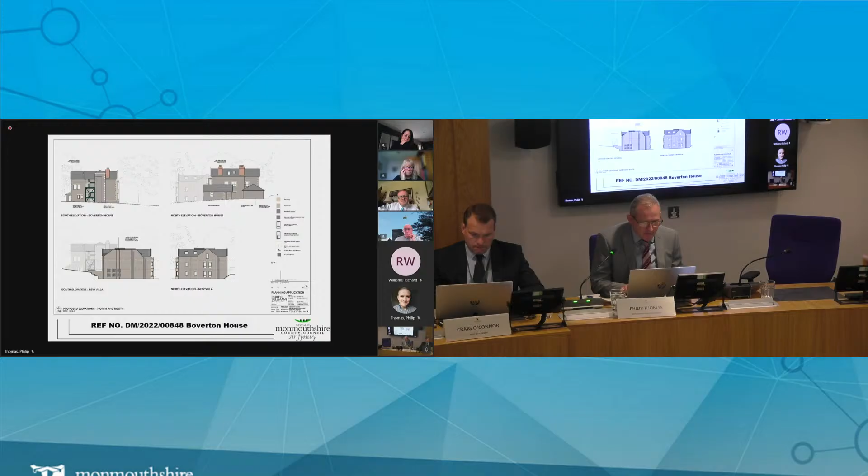And then that shows the layout. So you can see that the existing Boverton House is to the north and the new block to the south, and there will be parking in front of each of the two buildings there.

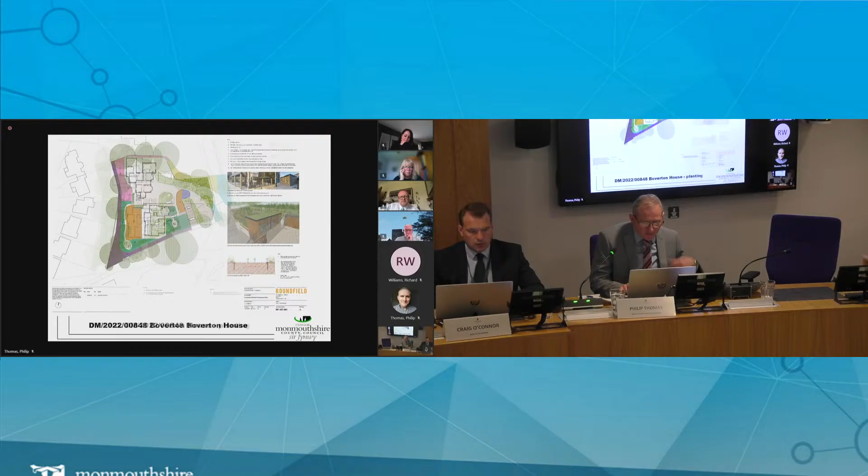And then that's the landscaping green infrastructure plan. There'll be extensive additional planting to green up the site and to reduce the impact of the additional parking spaces provided. The large mature trees around the periphery would be retained.

And then those are the floor plans of the apartment block: ground floor, first floor, second floor, and then some photos.

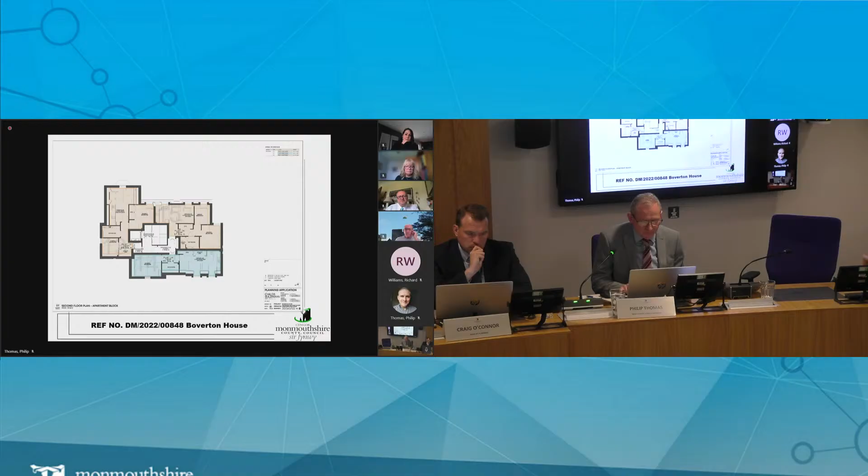So those are the issues. The existing boundary trees will be retained, and vehicle and pedestrian access to the site will be achieved through the existing access point at Bulwark Road, which will be widened by two metres to improve access for residents and emergency service vehicles.

The existing wall will be swept up the driveway to align with the altered road access. The existing access will be resurfaced, and the existing gate refurbished. In total, 21 car parking spaces will be provided within the site, and 20% of these will have electric vehicle charging points.

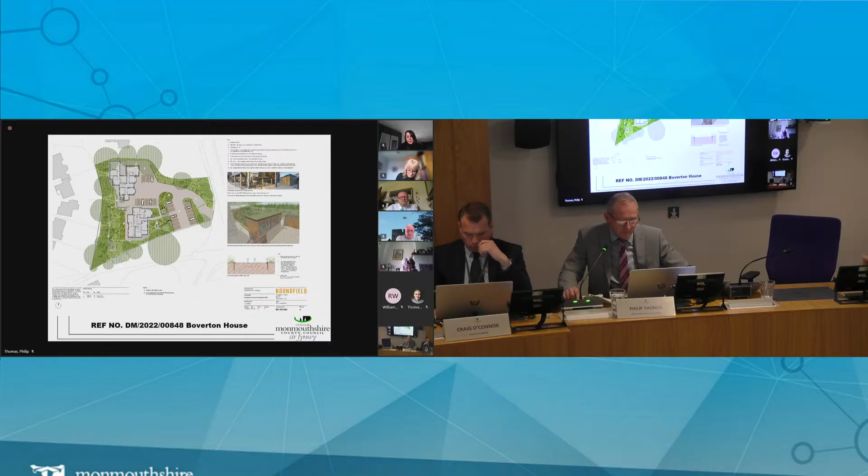In terms of e-bike charging, sorry, I haven't got that response—we can put that to the developer. I'm not certain it's something we can insist on at this stage, but we could encourage them to provide e-bike charging provision within their bike store there for up to 15 cycles.

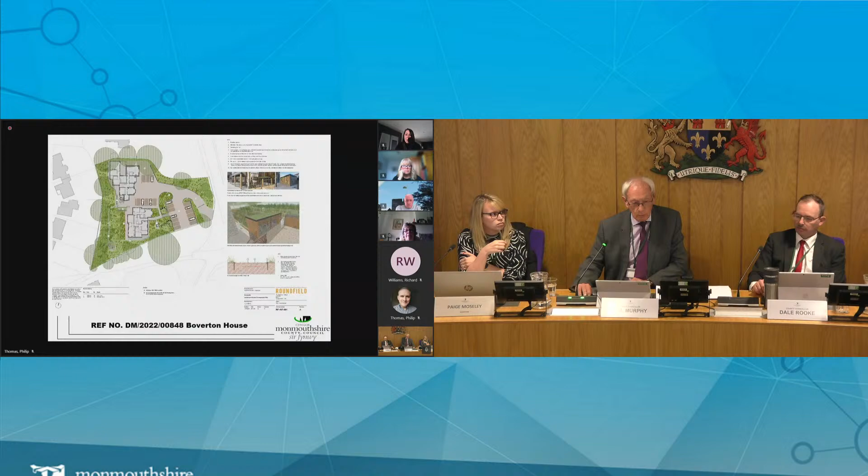Thanks for the presentation, Phil. I share your comments, Chair, about it being nice to bring an old dilapidated building back into use—I think it could be a big improvement on what's existing there at the moment. I had a question regarding the extension; it looks like an old lift shaft on the outside of the building, currently a tatty white. Looking at the diagrams, it looked like it was going to be refaced in stone with brick edging. Could you confirm that? I think that would be a big improvement if so.

Some of this involved negotiation with our heritage team, because whilst it's not listed, it's in the conservation area and makes a positive contribution to it. They're going to re-render it, keeping it simple, but it will be in better condition and aesthetically better from being re-rendered and repainted, so it will look a lot better than the rather tired appearance it has at the moment.

Okay, Councillor Bond. Thank you very much, Chair. Thank you very much for the presentation. Lovely old building, beautiful old building, lovely setting.

Really disappointed that there's no affordable housing, flats or whatever on the premises. I understand what you said about the independent advisor, and I think you mentioned when we were on site that if more profit was made out of the properties than anticipated, they'd be paying more back into MCC. I'm also disappointed this was an MCC building sold to a private developer back in 2020, and I wonder if we've got anything else we ought to hold on to before we sell any more off.

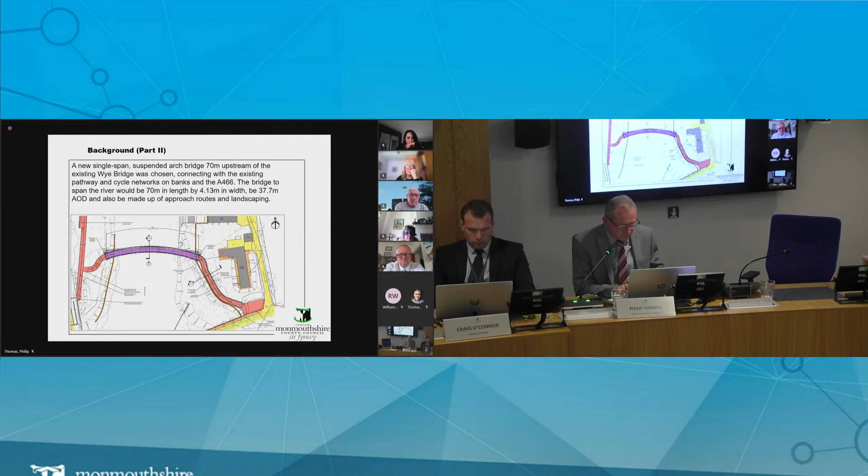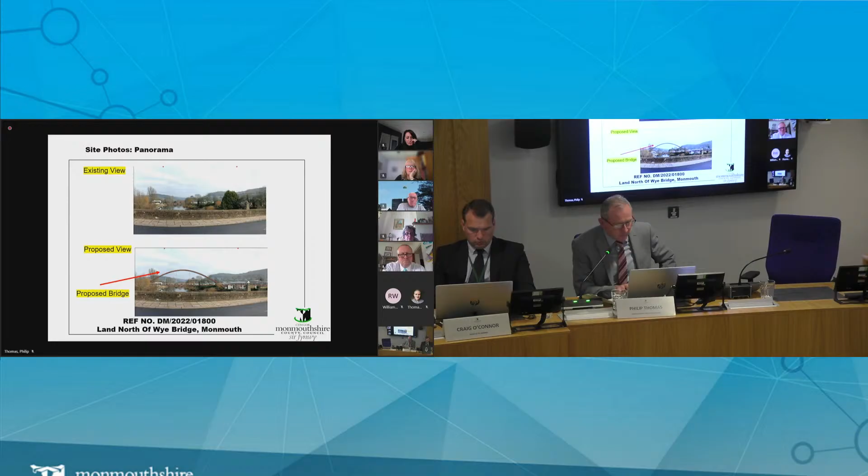That's a montage showing the before and after of how the span bridge would look, and that's probably an even better image there - clearer. That's from the middle of the existing road bridge, and that's from the other side, near the rowing club steps, where they launch their boats.

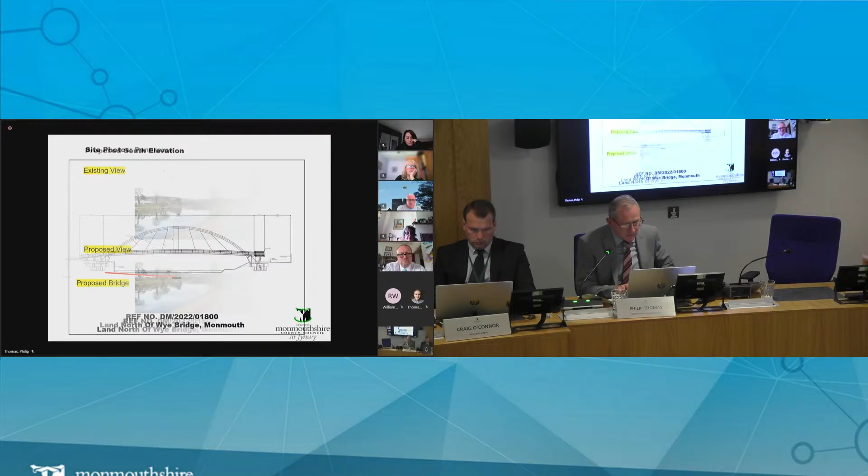And then that's an elevation of the bridge. There are no works within the river itself; it's all within the banked areas.

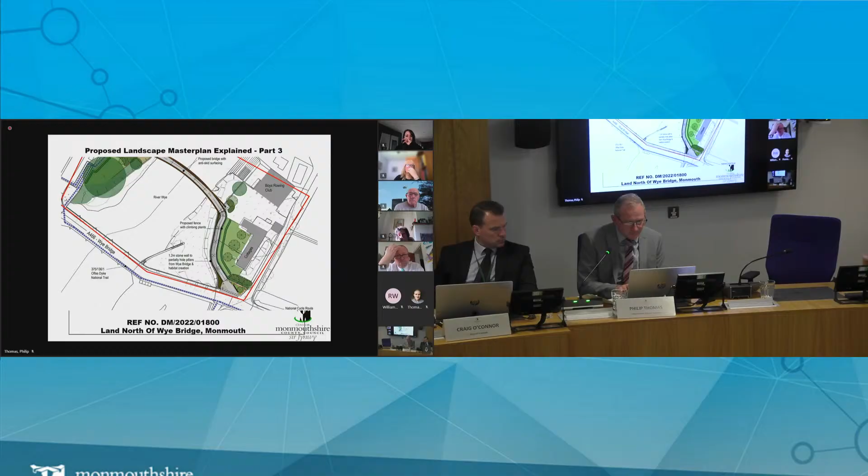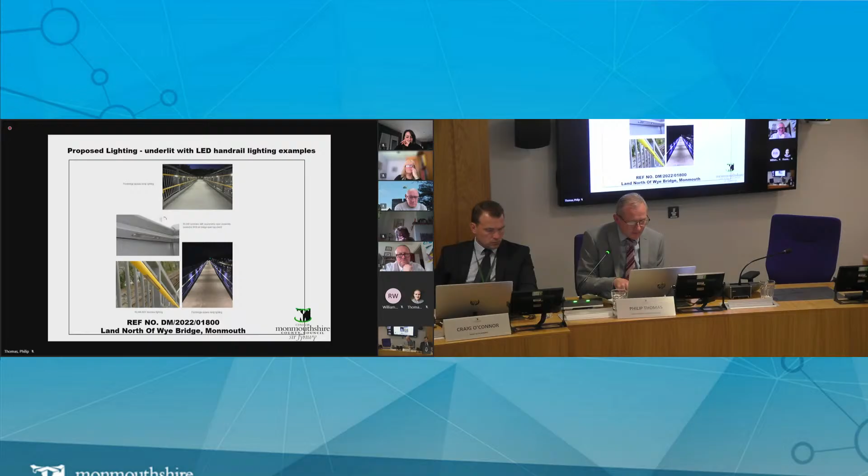And that's the sort of thing that there'll be subtle lighting to light the actual bridge for users, but not to let light spill out. And those are the main material issues.

As said, the main bridge is to be a steel cable-stayed arch structure comprising a curved deck suspended from a single arch via 7 pairs of cables, with a single span length of 70 metres, and the actual width of the active travel route within the bridge will be 3.5 metres wide.

It'll be modern in appearance, and the proposed materials have been carefully selected to respect the setting of the surroundings and the existing Wye Bridge.

As part of the development phase, an environmental colour assessment was carried out to inform colour selections, and weathering steel was selected for the main structural parts of the bridge, because once the material is weathered, the rust tones will complement the existing brown hues of the surrounding environment.

The use of brushed stainless steel for the hanger cables and guardrails would then complement the brown hue of the weathering steel. The lighter colour of the steel will blend into the skyline, particularly on overcast days, and there is a condition to ensure the details of the colours are agreed by the planning authority.

The proposed bridge is set 70 metres away from the listed road bridge, and there is a sufficient separating distance for it not to have any harmful impact on the bridge or its immediate setting.

The elegant span and arch of the proposed bridge sets it as markedly different to the listed structure, and this works in placemaking heritage terms, although details such as the balustrading and the stone wall for the eastern ramp have been requested to be conditioned.

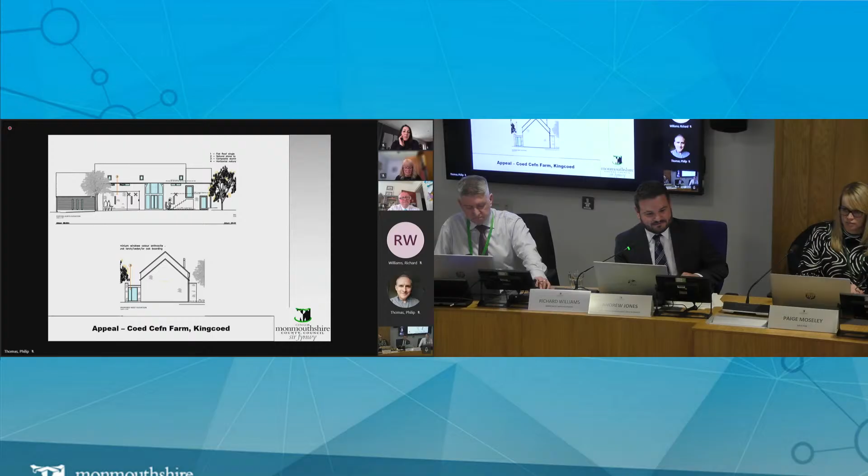Officers refused the planning application for two reasons. The first, on the basis that the existing access into the site would not be suitable as a private drive, given its restricted width. Officers felt that the use of this access by an additional dwelling would be detrimental to the safe passage of vehicles using the private drive, and therefore contrary to our adopted highway design guide.

And the second reason for refusal by officers was that the applicant had failed to enter an appropriate legal agreement to secure the necessary financial contributions towards affordable housing.

However, the appointed inspector found that having regard to the low traffic volume, domestic use of the driveway, and the driveway width and alignment, there was little evidence to suggest that an additional dwelling would give rise to significant highway safety risks. As such, the inspector concluded that the proposal was compliant with our relevant policy MV1.

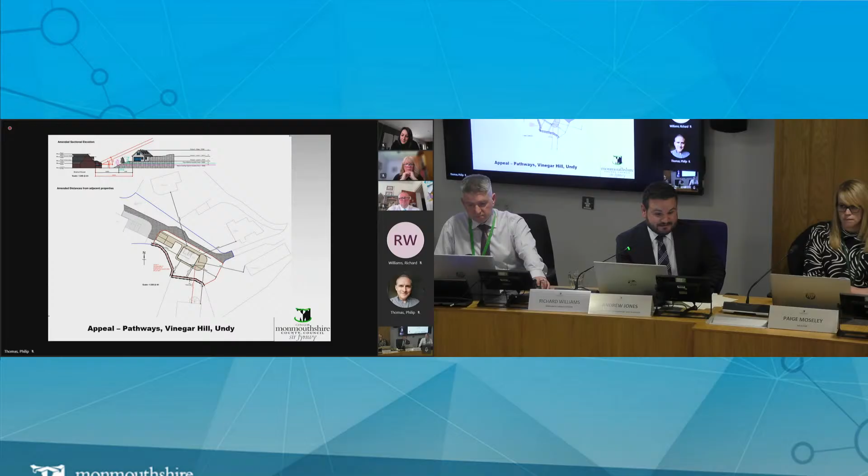However, there was an absence of a completed legal agreement to secure the affordable housing provision, and it's on this basis that the appeal was dismissed. So on the point and reason for refusal regarding highway safety, the inspector was not in agreement with us, but ultimately the lack of a Section 106 agreement was the reason it was dismissed.

Chair, can I have a say on that please? I'm so disappointed that this appeal has not been granted to us. It was clear that this application did not conform to the 4.1 metres that you agreed as officers. I just wondered whether we have any redress on this, because this road...

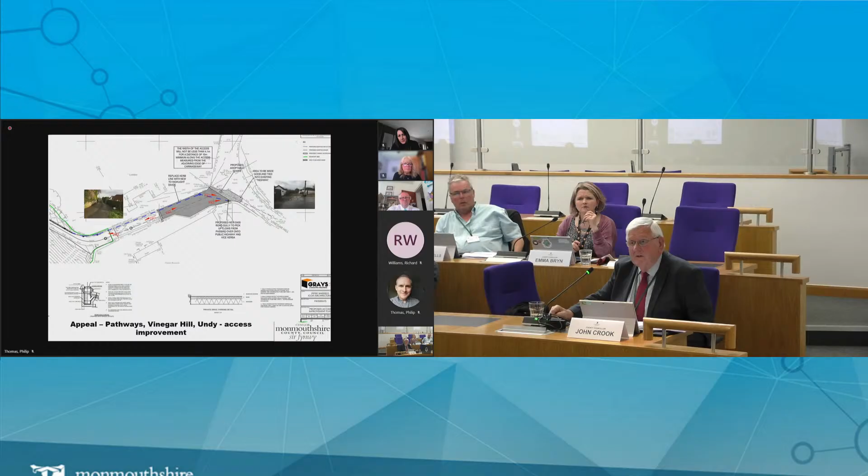So they've not got planning for it. The appeal was dismissed. Sorry, I understood that... No, they agreed that the highways was all right, but they turned the appeal down on the basis of the Section 106 agreement, so it was dismissed. I beg your pardon, I understood it was on access to Vinegar Hill.

Craig? Thank you, Chair. With regards to the reason for refusal on highway safety, yes, what Chair has just said is completely correct - the planning inspector found that the highway safety is acceptable. What I think you're referring to, Councillor Crook, is that if a similar application comes to us in future, we wouldn't be refusing on highway grounds, because we've had this decision from the Planning and Environment Decisions Wales group. So it wouldn't be a future reason for refusal. Ultimately, if the affordable housing contribution is provided, the local planning authority would be in a position to recommend approval.

Apologies, Chair, I misunderstood that. That's okay, glad we've cleared it up.